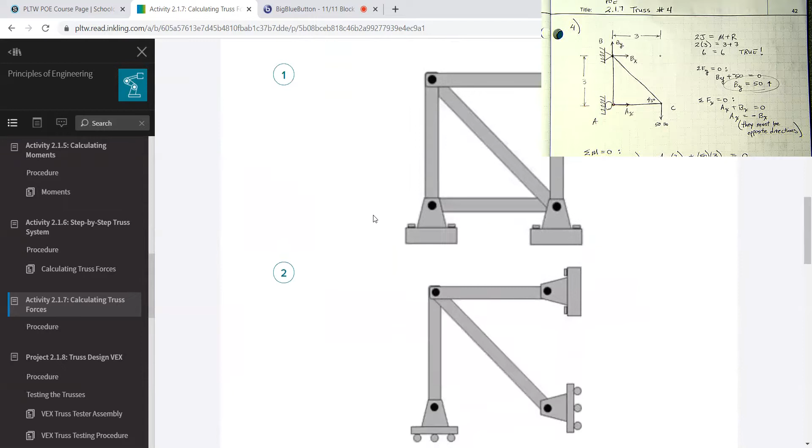I don't know how well you can see that equation, so I'll just tell you: 2 times j equals m plus r, where j is the number of joints. Looking at this figure, you get 1, 2, 3, 4 joints. M is the number of members, and that is 1, 2, 3, 4, 5 members, so m equals 5.

Then r is the reaction force from each of the supports or mounts. Here's a picture: this is a pinned support, and this is a roller support. I'm not going to explain exactly why a pin support has 2 reaction forces and a roller support has 1 — you can just trust me for now: a pinned has 2 and a roller has 1.

So if you're counting the number of reactions, 2 plus 1 is 3. Then for the number of members, remember the equation m plus r — the r was 3 and the m was 5. So what is 5 plus 3? Uh-oh, I already made a mistake — I was looking at the explanation of the diagram, not the actual support system here.

Let's start over: 4 pins, 1, 2, 3, 4 pins. 5 members, 1, 2, 3, 4, 5 members. This is a pin support with 2 reaction forces, and this is another pinned connection with 2 reaction forces. 2 plus 2 is 4, so remember the R is 4. The M is 5, so 5 plus 4 is 9. That feels a little more comfortable to me — 5 plus 4 is 9.

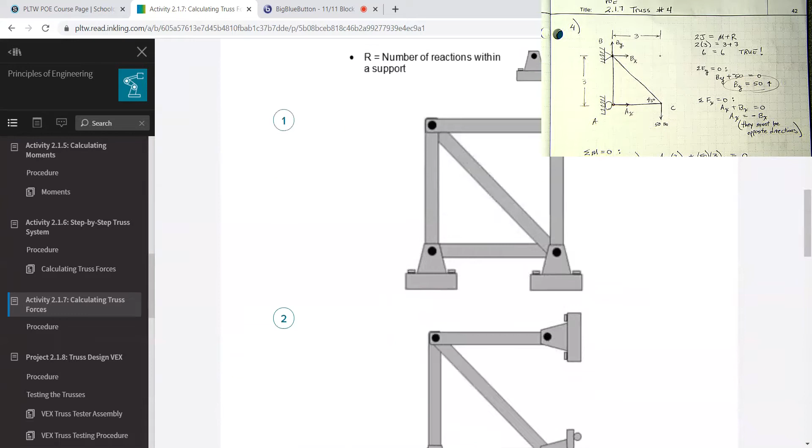However, it has to equal 2 times J. The joints are 1, 2, 3, 4, so 2 times 4 is 8. We got 8 equals 9, which is false, and therefore that truss cannot be solved.

I'll give you a little hint, or just give you the answer: number 2 is also false when you test it, and number 3 is also false when you test it. So all 3 of those are false according to the determinant equation 2j equals m plus r. You can look at those and figure out what the j's, m's, and r's are.

Then we get to this one. This one has a pinned support, which counts as 2 for the r's. This one's a roller, which counts as 1, so 2 plus 1 is 3. Then there are 1, 2, 3 members. So remembering the equation, m is 3 and r is 3, which equals 6. Then you have to count the number of joints, which is 1, 2, 3.

According to the equation, you multiply that by 2, which is also 6. 6 equals 6 is true, which means that truss can be solved. And what do you know? They gave us a bunch of information to see if we could solve it.

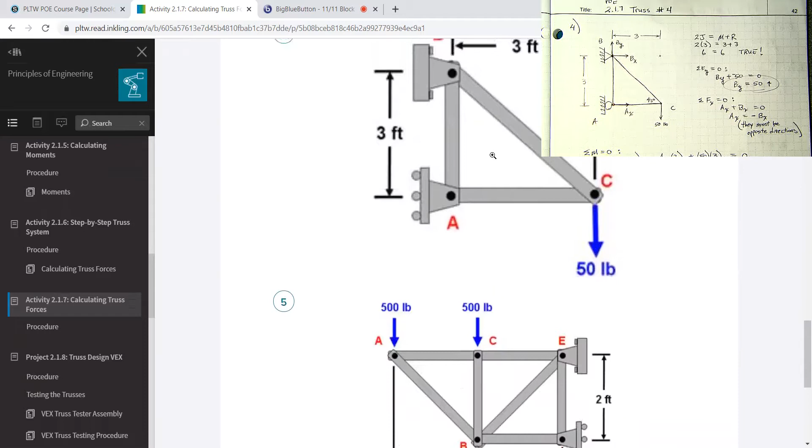You can see the picture yourself, 3 by 3, ABC, 50-pound applied force, and there's a pinned support and a roller support. Now let me show you my work.

See, this is working, Nathan. So yes, it's working. And I actually already have the work shown here. Oh, I can just point at my paper with a pen and my hand.

Okay, so there's the 3 by 3, and there's the ABC, and there's the pin support and the roller support. That's how I draw a pin and a roller. And then the equation again, 2j equals m plus r, 2 times 3, there's 3 joints, 3 members, and 3 resistance forces, 6 equals 6, so it's true, it is solvable.

It is solvable. Now, if you remember the original picture, they gave us a 50-pound applied force, but I don't think they gave us anything else besides those measurements 3 and 3. So I figured, looking at this roller, that there must be a force, one of the resistance or support, or resultant. No, it's resistance, I think.

One of the support forces. And so since this one is at A and it's in the X direction, I called that force A sub X. So you got A sub X, you got the 50.

And then here at B, there's two resistance forces or two support forces. This one is the B force in the X direction. This is the B force in the Y direction. There's two of them, an X and a Y. There's only an X on the roller.

So I also figured out, sort of accidentally, that if this is 3 and this is 3 by 3, and the diagonal is following that 3 by 3, that would have to be 45 degrees. And that will be relevant later, way down the solution.

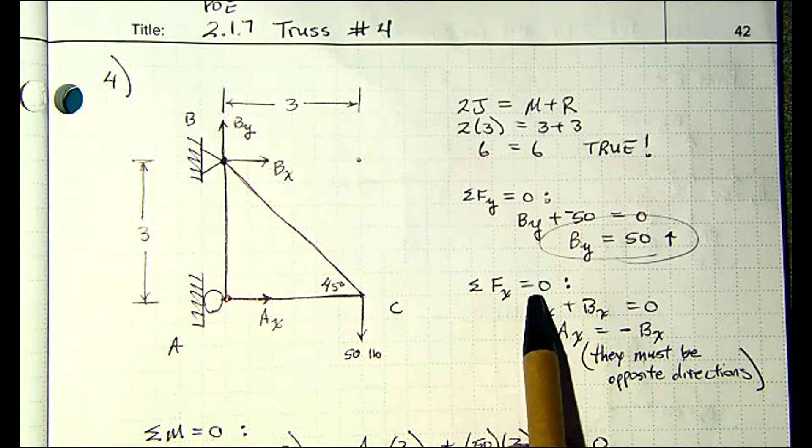Okay, then I had to figure out the sum of the forces in the X direction, and I know the sum is going to be 0. So I had to figure out what this A sub X and this B sub X are, those are the only 2 X forces that I have. And I know they have to cancel each other out.

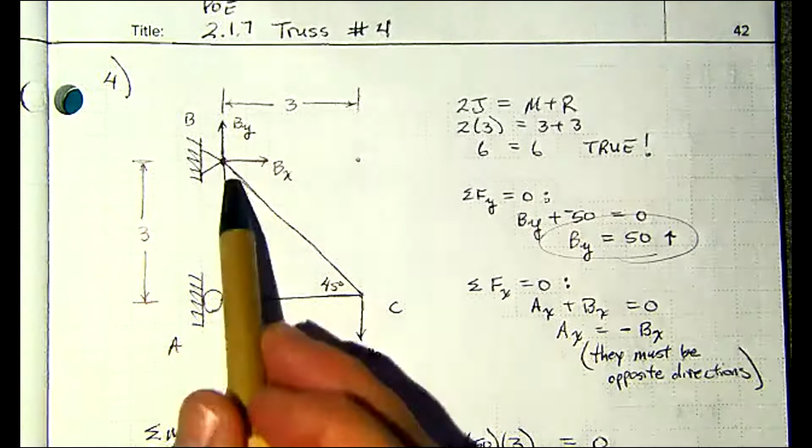And I already see that there's a problem. Don't panic, Lewis. Don't panic. I see that there's a problem, but I knew it from the beginning that this A sub X and this B sub X cannot be both in the same direction.

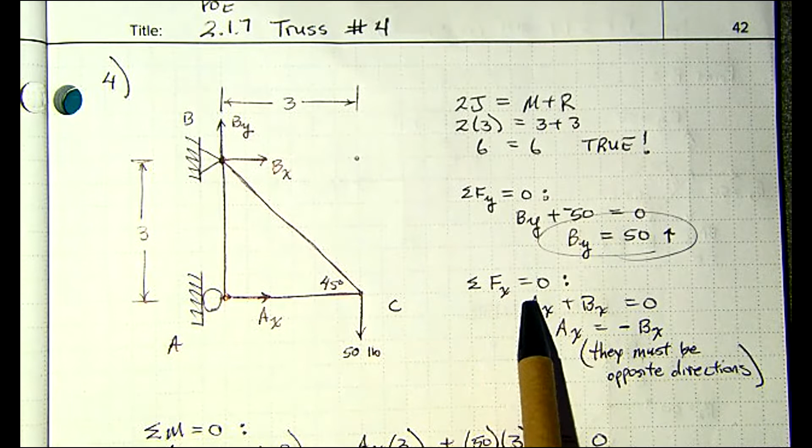One of them is reversed. When you look at the sum of the forces in the X direction equals 0, I take the X force, A sub X, and another X force, B sub X. I add them together and get 0. You can't add two positive numbers and get 0, so one of them has to be negative. Arbitrarily, I said A sub X is equal to negative B sub X. They must be in opposite directions.

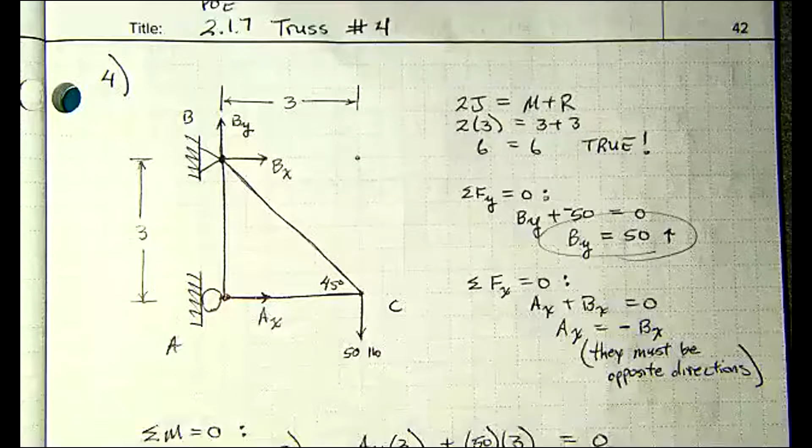Okay, this is sort of working a little bit. Let me move that out of the way. That was strange. Okay, now I'm going to slide up the page, just remember everything that was up there above.

So now I have the sum of the moments. In physics class we call it torque, or moment of inertia maybe, but in engineering we call it a moment. The sum of the moments is equal to 0, just like the sum of the X forces is equal to 0 and the sum of the Y forces is equal to 0.

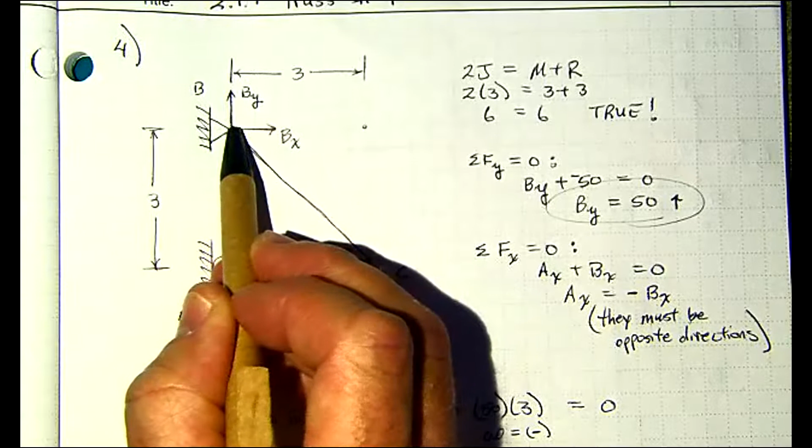When you're calculating moment, you have to determine what your relative point is. You can choose anywhere, but some are more convenient than others. I chose my relative point to be B, because whatever point you choose, any forces applied at that point get automatically canceled.

Mr. Tone just walked by, everyone. Yes, Mr. Tone, yes indeed. And here he has arrived. Come on in, Mr. Tone. Let me pause my recording. Resume, I think I've resumed recording. I don't exactly remember where we were before Mr. Tone walked in, a good friend of mine, AP English teacher. He loves The Great Gatsby and the Beatles.

So when we left off, I think I was talking about moments. Is that what I was talking about, guys? Okay, the moments. So all the moments have to add up to be 0, well, they have to sum to be 0.

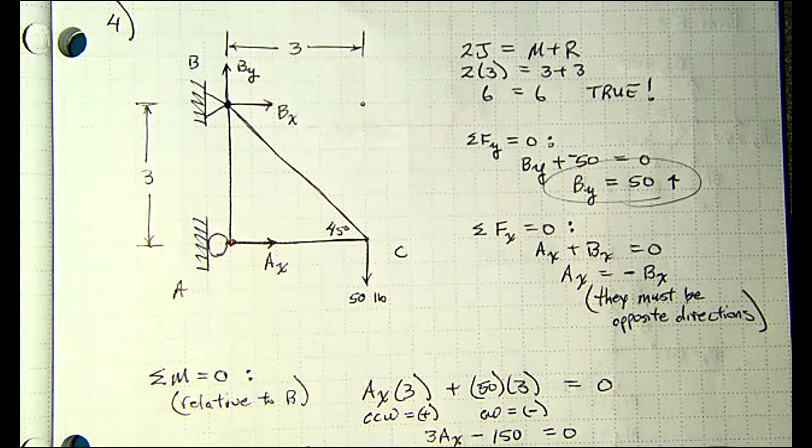Now, what a moment is, is the force multiplied by the distance to the pivot point, or not pivot, but the point of rotation or potential rotation, or the relative point that I've chosen, which I chose point B.

So for the moment caused by A sub X, it's going to be the value of A sub X multiplied by the distance, which is 3. And the value of the 50 applied force is 50 times the distance. I know you're looking at this thinking it's a diagonal distance, but we measure it from the perpendicular of that vector, which is straight vertical. So we measure it across here. So the distance for that 50 is also 3.

So we get A sub X multiplied by 3, and we get 50 multiplied by 3, and they have to add up and equal 0. So I hope you can see that they both can't be positive in that scenario.

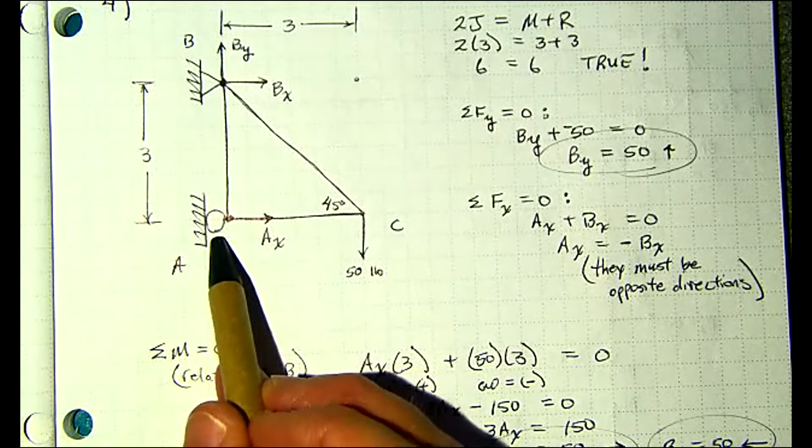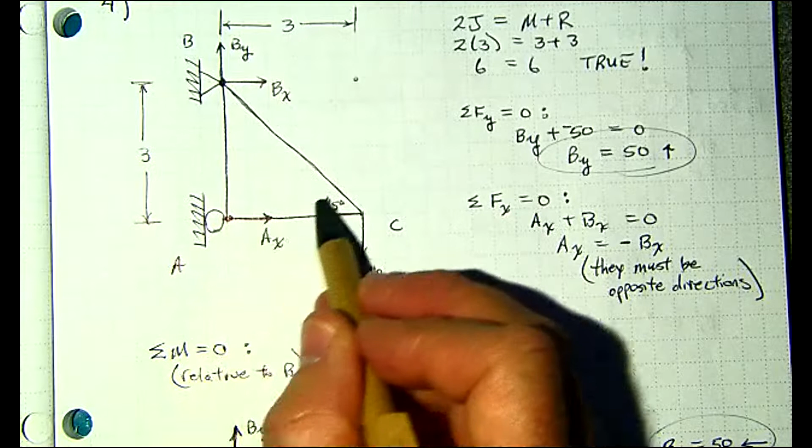Something I know about the A sub X force when it comes to rotation: if I'm using B as my pivot point, then the rotation here, if you follow that—and don't worry, it's not actually rotating—but A sub X is trying to make it rotate, and that direction of rotation is counterclockwise. Counterclockwise turns out to be positive, and that's what I have here. I don't know how well written that is.

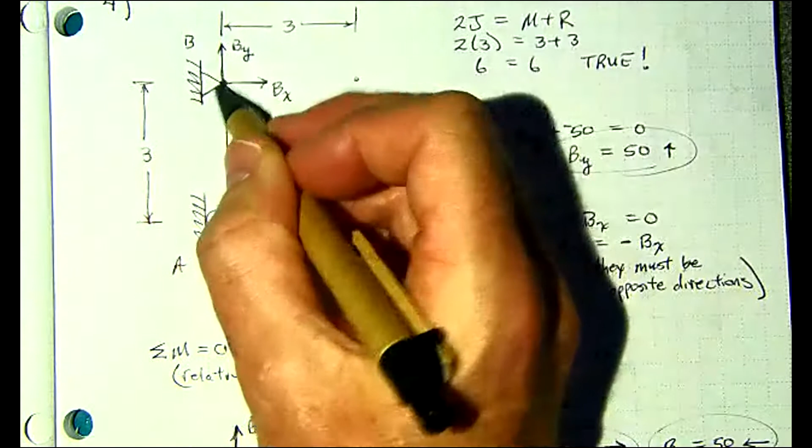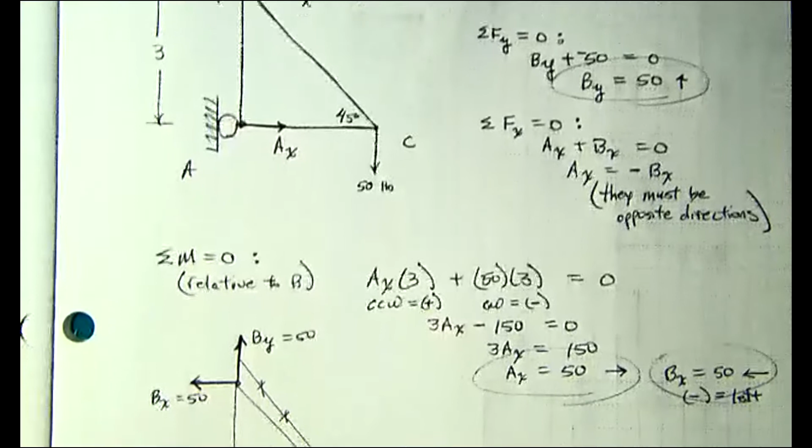CCW, counterclockwise, is positive. And then this C force that's pulling down, if it's relative to the B point, it's trying to rotate in this direction, which is clockwise, and for some inexplicable reason, clockwise is negative. I actually do know the reason, I'll explain it to you if you ever want to know. So then clockwise would be negative, that's supposed to be a little CW.

So I got 3 times A sub X—remember, that's a 3, A sub X is unknown. I've got 50 times 3, which is 150, however it's negative. And then when you solve this equation, you get 3 A sub X equals 150 with the inverse operation.

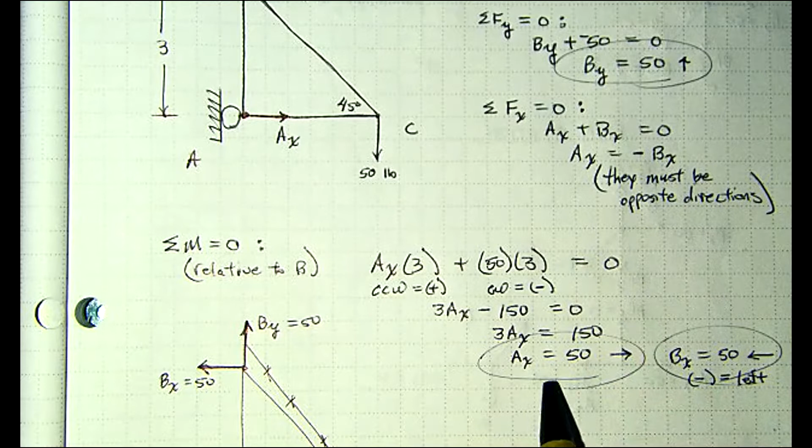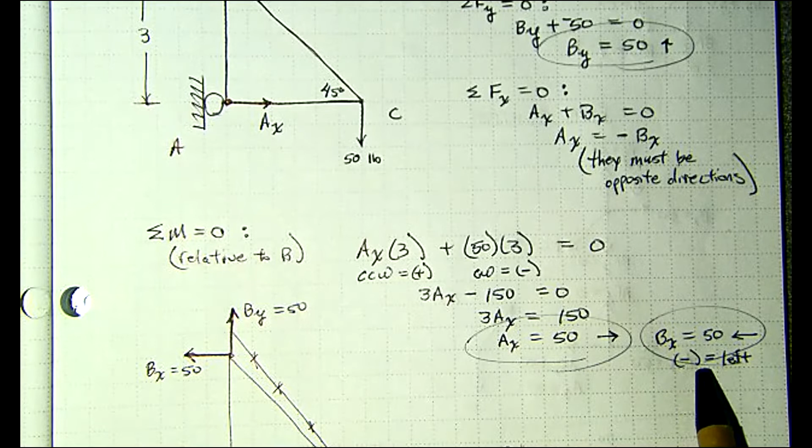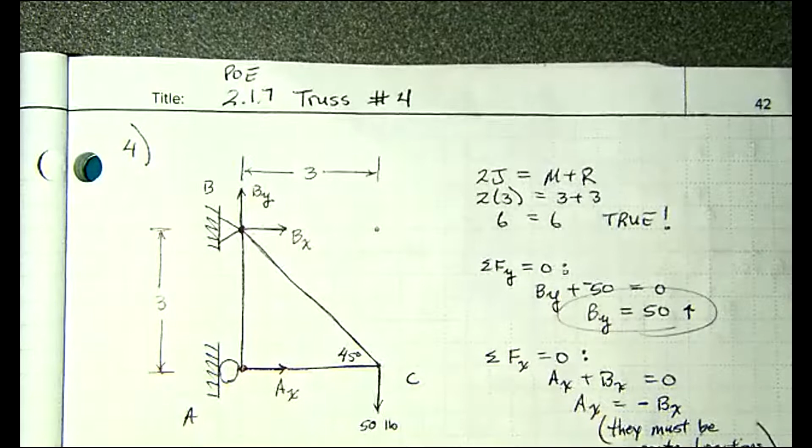And then you get a sub x equals 50 with the inverse operation. Remember, a sub x and b sub x have to be equal and opposite, one of them negative. If a sub x is 50, then b sub x has to be negative 50. Notice I did not put a negative sign there, I wrote negative equals left. So this force is 50 to the right, this force is 50 to the left. Back in the original picture, my b sub x looks backwards, and I knew one of them would be, we'll address that later.

Based on what we have so far, I can redraw my truss with the 3 points, A, B, and C, remembering that was 3, that was 3, and that was 45 degrees. There's an applied force down 50, an A support force in the x direction to the right 50, a B sub x support force to the left 50, and a B sub y force up 50, which is kind of nice.

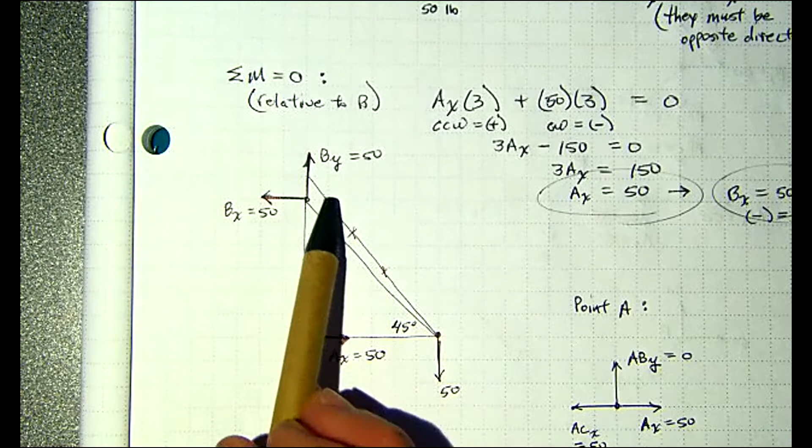Notice that I have an error here, I kind of got off track when drawing that line. So these little X's mean to ignore that line.

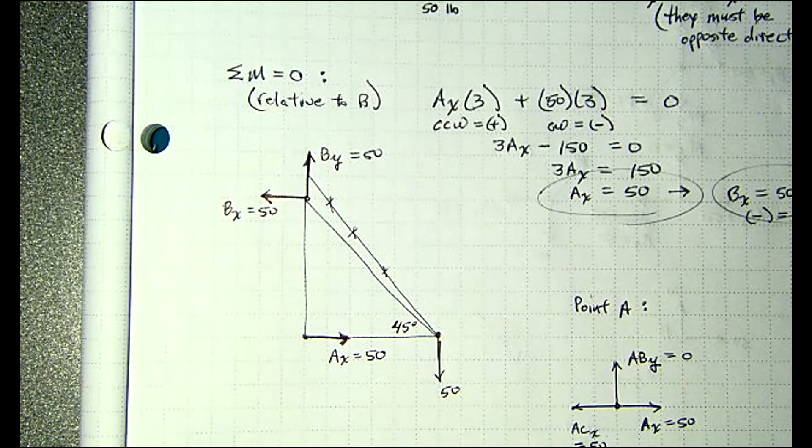Moving on, that's only half of the problem. Everything I've said for the past 30 minutes is only half of the problem. So next is what's going on at each individual point.

At point A, there is an A sub x force being applied to the right. Here it is, at the A point there's an A sub x force applied to the right. Now, you cannot have a force existing in isolation, no force may exist alone, it has to have an equal and opposite partner. So this A sub x equals 50.

There's another force to the left equal to 50, however this one is called A C sub x. Where did that come from? That is the force on point A from point C, this one applies a force through the member onto the other one. That's what A C sub x is, the force on A from C in the x direction. It has to be equal and opposite of the only other horizontal force, so they are both 50, one to the right, one to the left.

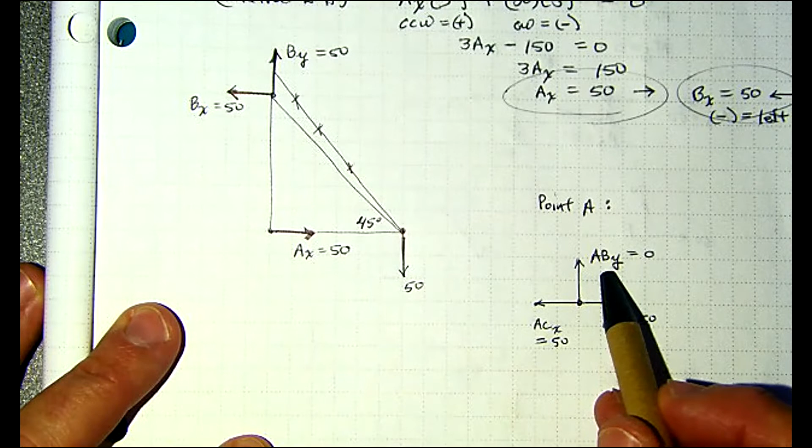Now this one is the force acting on point A from point B, and we notice it's in the vertical direction. That's right here, the force on A from B in the vertical direction, sub y, equals 0. How did I know it was 0? Because there's only one force there, and I said just a moment ago you cannot have one force, you must have an equal and opposite force. There was no other force, so it actually doesn't even exist. I've drawn it there, and the value of that is 0.

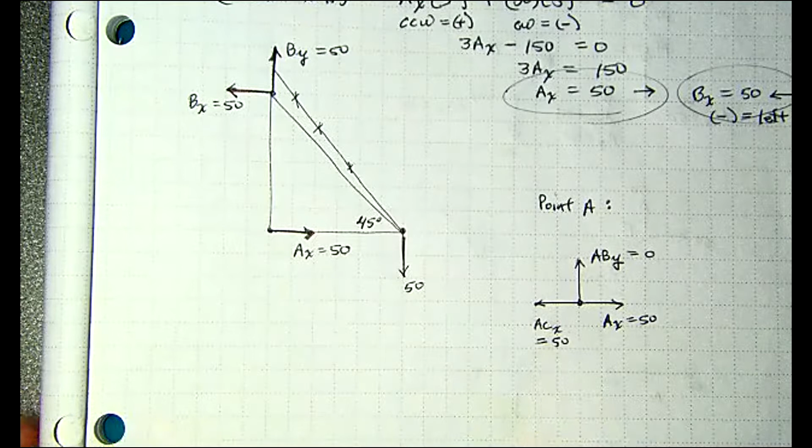Okay, point A has been completed. We have the overall truss, which we did, and we have point A now, which we did. Remember, this is like a Sudoku, whatever happens at point A is going to affect point B and affect point C. So now I have turned to the page, just like... who's that? Bob Seger, Turn the Page. Wonderful, wonderful song. Point B now, I have to do an analysis of that point.

Remember, I had a vertical B sub y support force of 50, and a horizontal B sub x support force of 50. Now this B A sub y, well actually remember it was A B sub y because it was the force on A from B. Well, it's the same force on B from A, an equal and opposite force from the other member. Trust me.

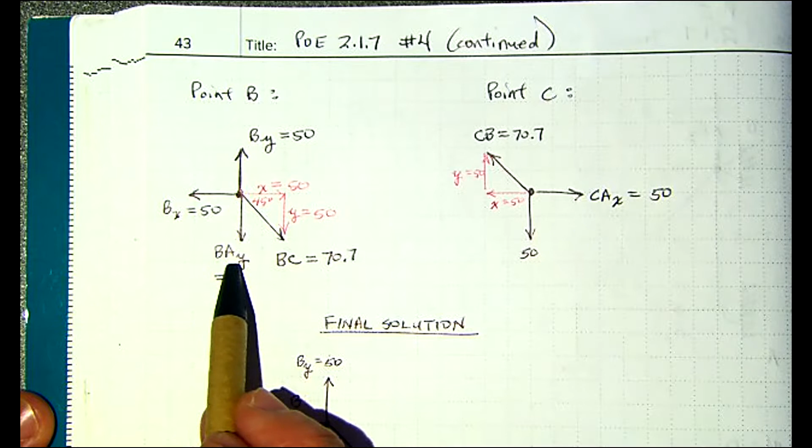BA, the force on B from A in the Y direction, was 0 at point A, and it has to be 0 at point B as well. So that force, even though we've drawn it there, does not really exist.

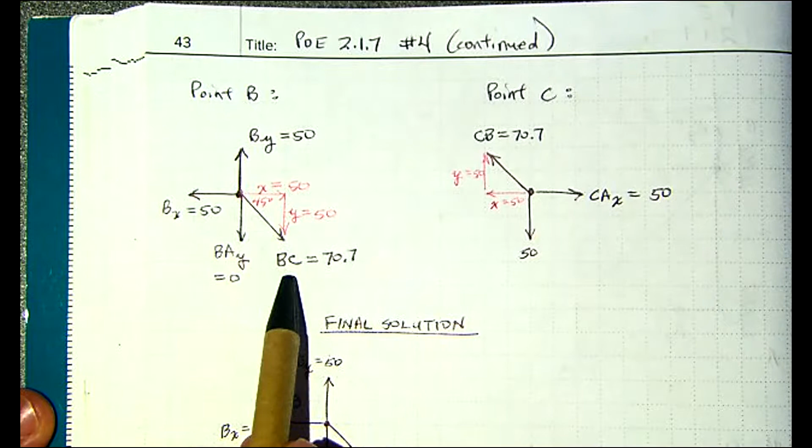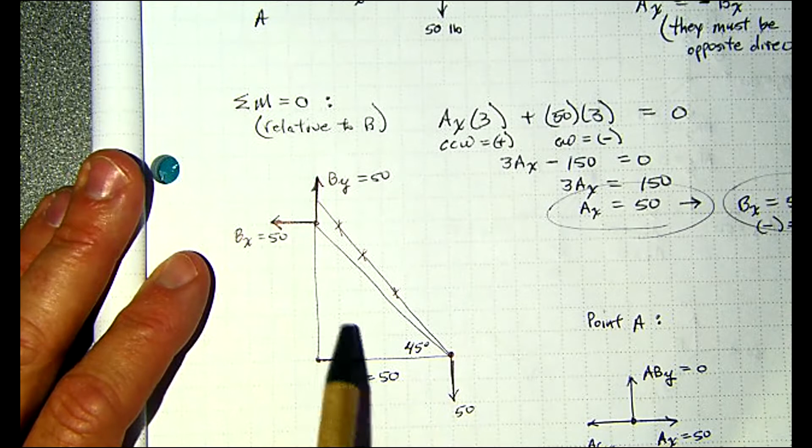Then we have this thing, BC. Where does BC come from? It comes from this solution we had - it's the force on B from C. It's Sudoku, everyone - what happens at one point affects the other. The force on B from C, and so I don't know what that is.

When I drew this originally, I just labeled it BC, and I didn't know that it was 70.7.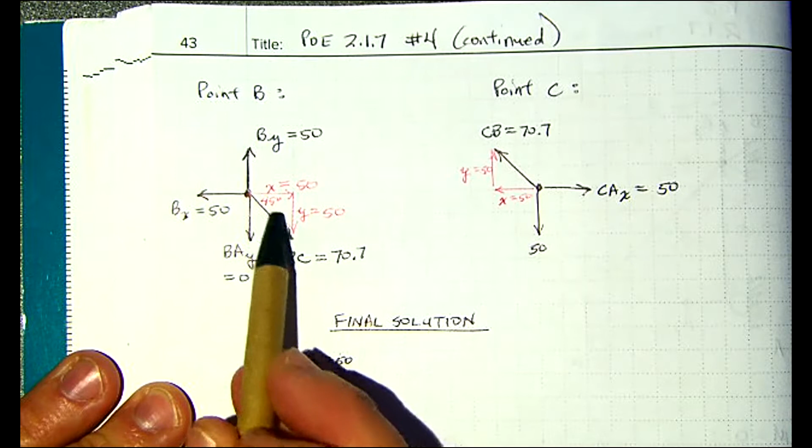But what I do know is that it's a 45-degree angle, and that angle is going to have a horizontal component and a vertical component. I don't know anything about the horizontal component except that it is equal and opposite to B sub x, which makes it 50. And the vertical component has an equal and opposite over here, which is 50. Remember, this one is 0, doesn't really exist.

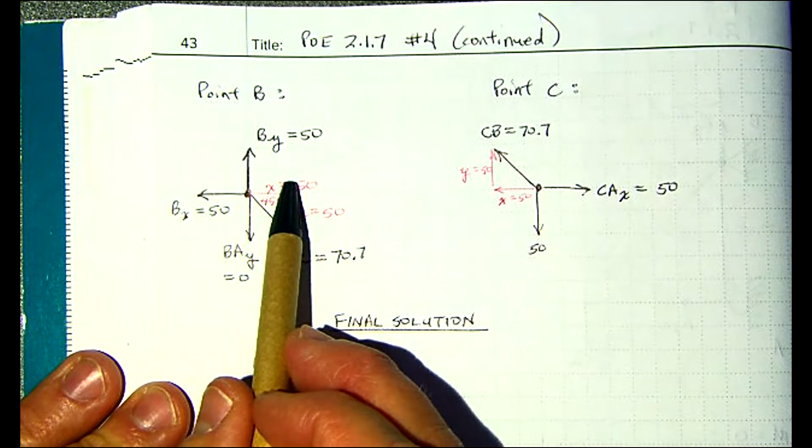And all of this really makes sense because if this is a 45-degree angle, then the legs have to be equal, 50 and 50. Using the Pythagorean theorem - just trust me - 50 squared plus 50 squared, square rooted, gives you 70.7. Now we're done with point B.

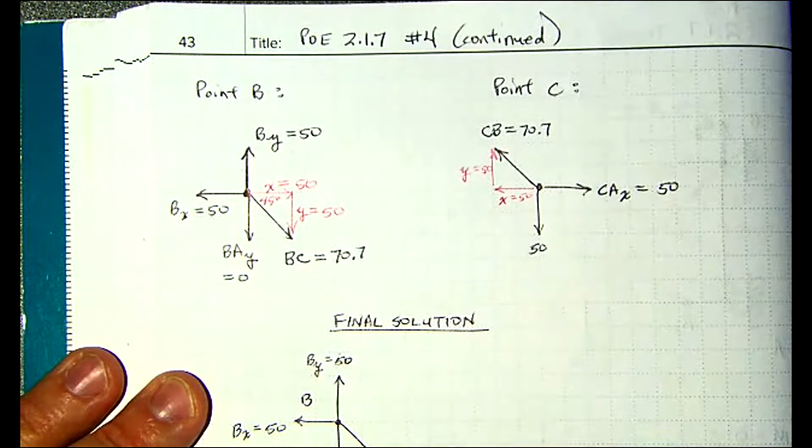Let's look at point C. It is being affected by the other points. Remember there was a force on A from C? Well, there's an equal and opposite force on C from A. Trust me, on the other side of this page it says the AC sub x is 50, so that means CA sub x is also 50, but in equal and opposite directions. The one on point A was to the left, so the one on point C is to the right.

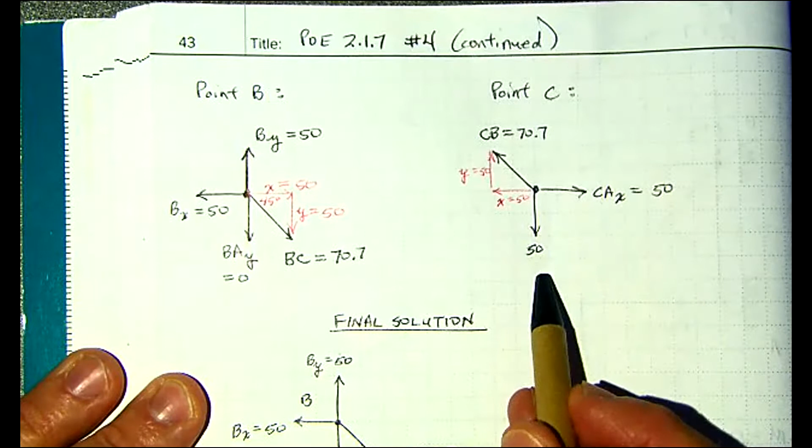Then we have the applied force. Remember the original applied force of 50? Well, it's there. But then there's this diagonal force - remember there was a diagonal member from B to C? That diagonal member still exists from C to B, and there is a force on C from B.

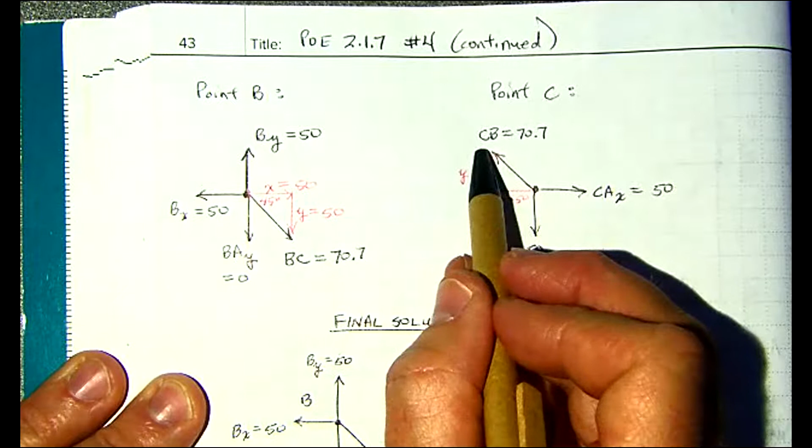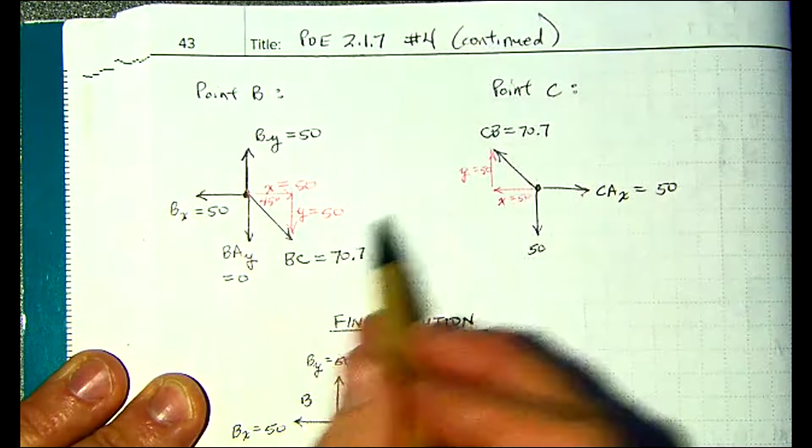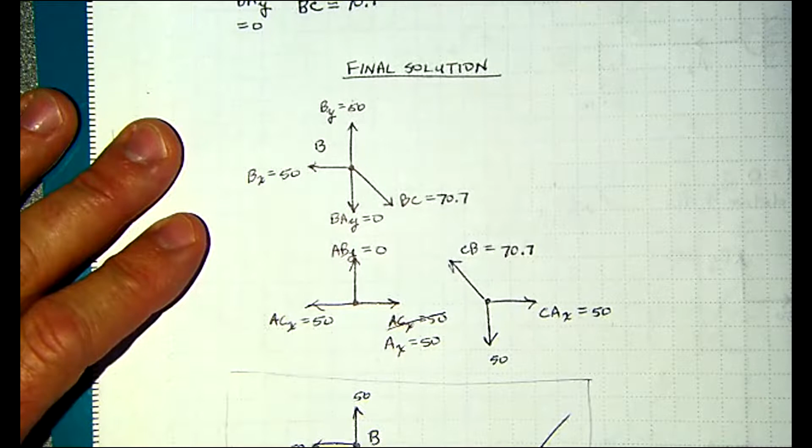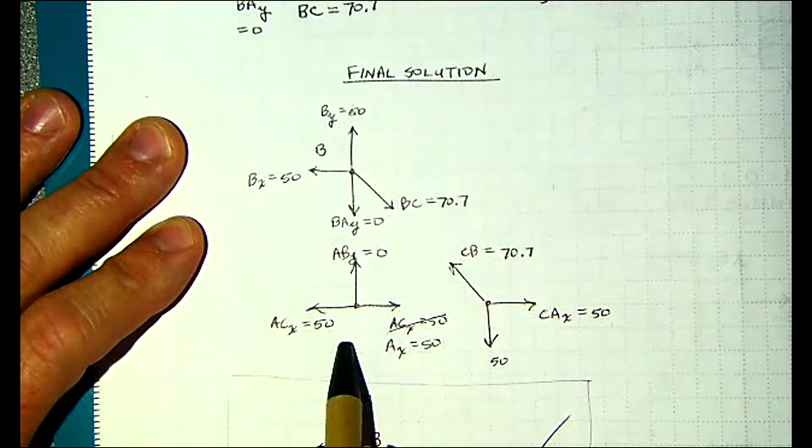So we put all this together to have a final solution. You've got point B, point A, point C. Point B has a 50 to the left, a 50 up, a 0 down, and a 70.7 on the diagonal. Point A has a 50 to the left, a 50 to the right, and a 0 up - so these don't really even exist at all.

And then at point C, we've got a 50 to the right and a 50 down and a 70.7 on the diagonal. I mislabeled this before, so that's why that's crossed out - A sub C sub x is to the left, A sub x is to the right.

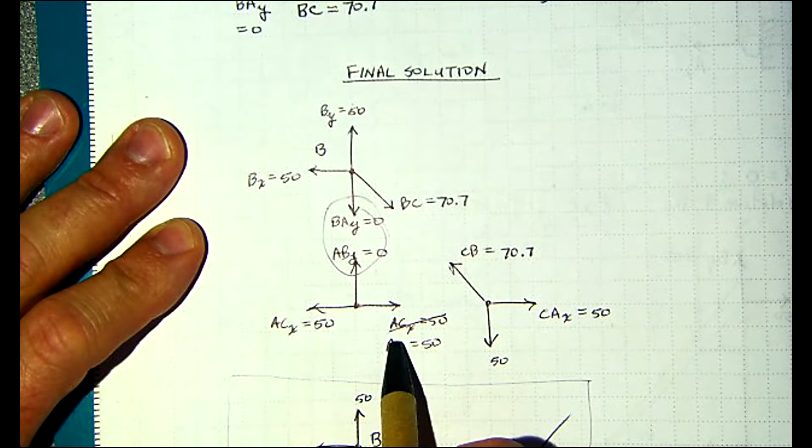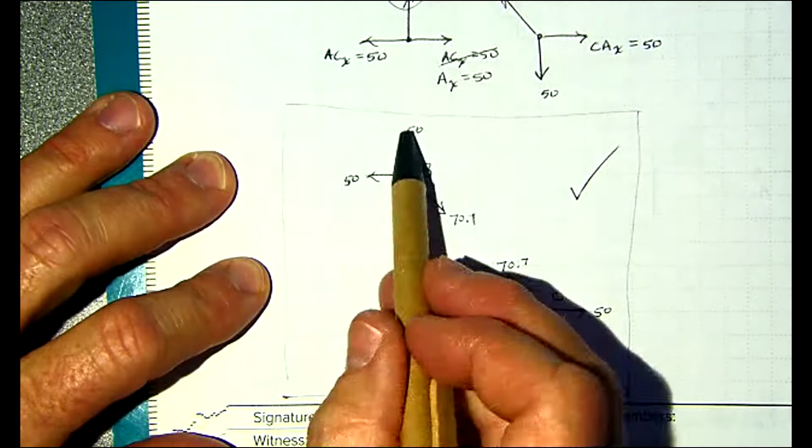Then to really clean this up - this is it. Notice it's got a box around it and a big check mark indicating that that is the solution and it is correct. Point B with the forces acting on it, point A with the forces acting on it, point C with the forces acting on it. We know what all of the values are for all of those forces.

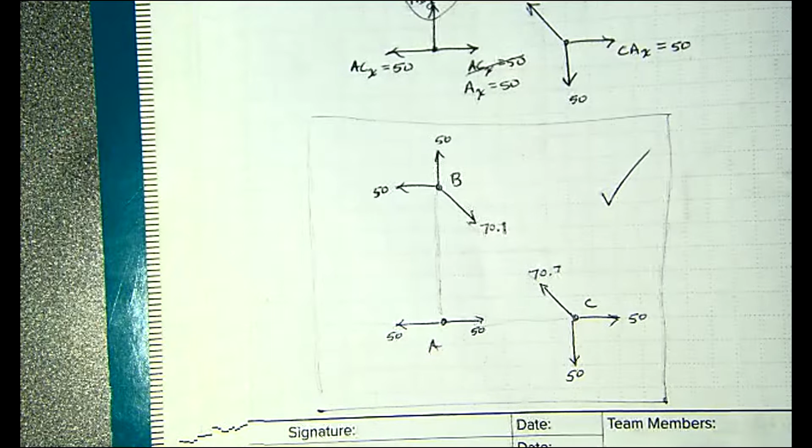So for the first time ever, we can celebrate the fact that we have correctly and completely solved a truss problem. Yes, yes, yes, everyone! So thank you so much. I finally feel good - it's nice to finally feel something positive.